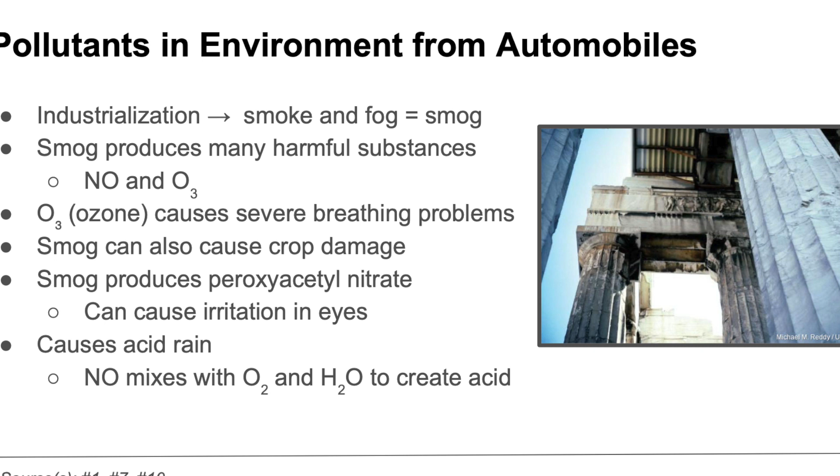One of the effects of smog can be seen here in the picture on the right. It was taken from the columns of the Parthenon in Athens, Greece, which is one of the most traffic-polluted cities. As you can see, the columns have been blackened by vehicle pollution, which is indicative of the problems that industrialization pollution has caused. Also, it just looks plain ugly.

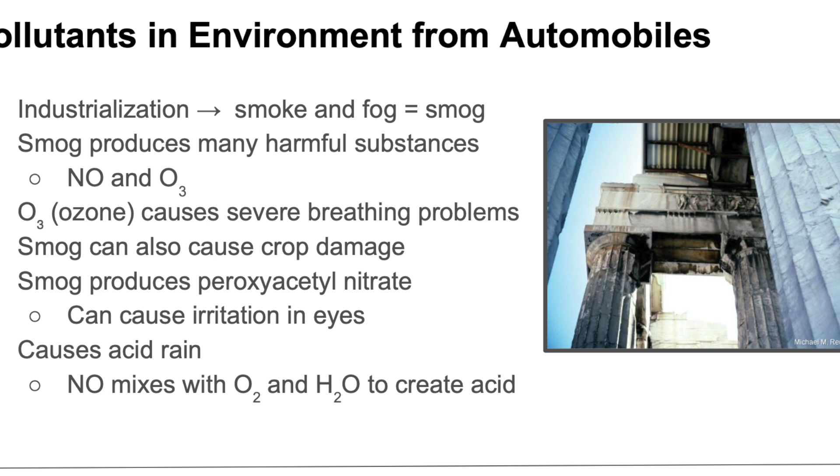In 1990, the Clean Air Act required that all automobile manufacturers install catalytic converters to comply with emission standards. The Clean Air Act was first enacted in 1955 with major revisions in 1970, 1977, and 1990.

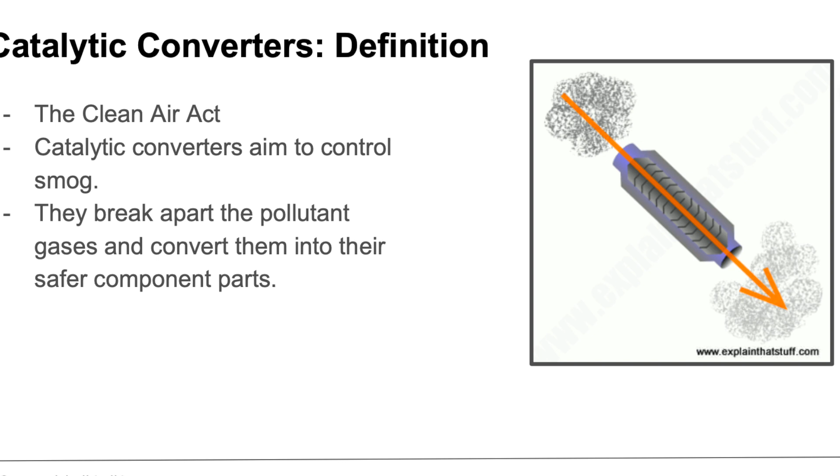The Clean Air Act requires the Environmental Protection Agency to set health-based standards for ambient air quality and set deadlines for the achievement of those standards by state and local governments. It also requires the Environmental Protection Agency to set national emission standards for large or ubiquitous sources of air pollution, including motor vehicles, power plants, and other industrial sources.

The Environmental Protection Agency mandates emission controls for sources of 187 hazardous air pollutants, many of which originate from combustion engines, including nitrogen oxides and carbon monoxide. It requires the prevention of significant deterioration of air quality in areas with clean air and contains a program to restore visibility impaired by regional haze or smog in national parks and wilderness areas.

The Clean Air Act also implements the Montreal Protocol, an international treaty signed by the United States to protect the ozone layer to phase out most ozone-depleting chemicals. Catalytic converters were originally added to cars around this time to help reach these goals.

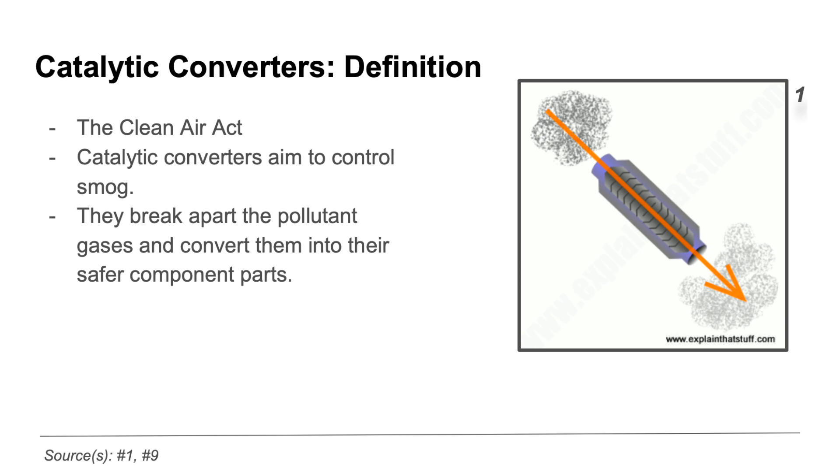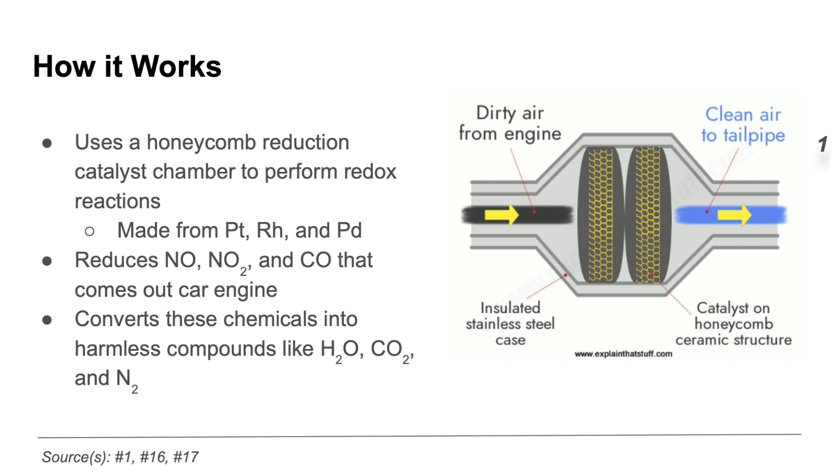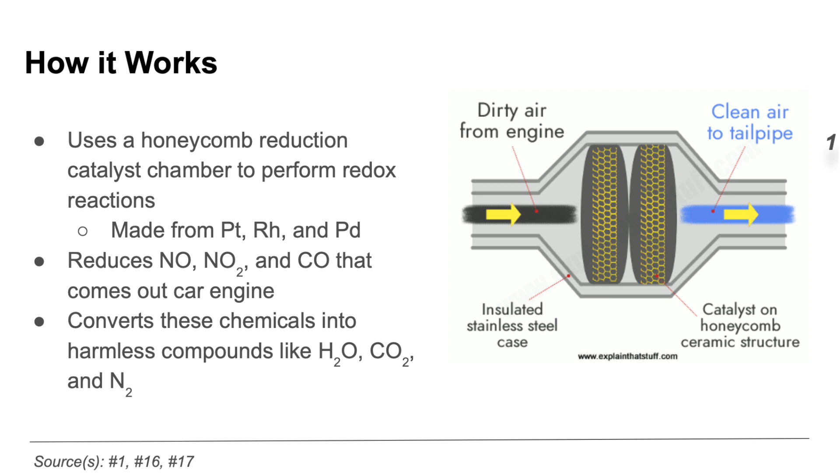A catalytic converter is essentially a component in a car that works by purifying harmful engine emissions with a honeycomb catalyst chamber. This honeycomb chamber is coated with a layer of platinum, rhodium, or palladium. The purification process happens via redox reactions that reduce harmful compounds such as nitric oxide, nitrogen dioxide, and carbon monoxide into harmless compounds like water, carbon dioxide, and nitrogen gas.

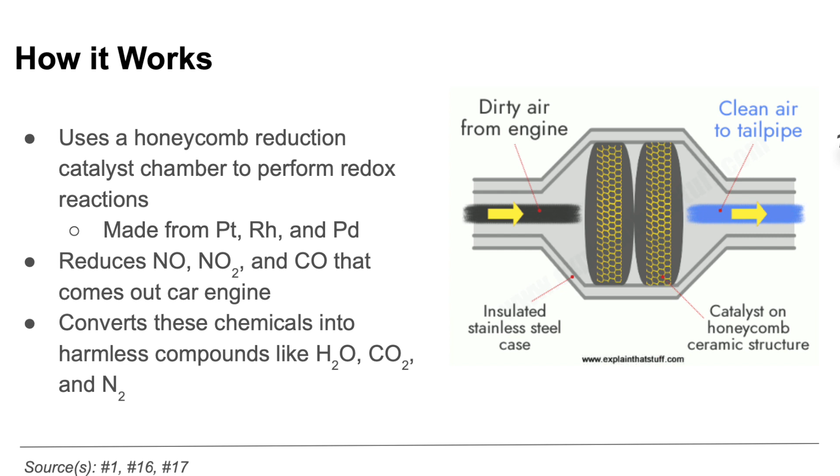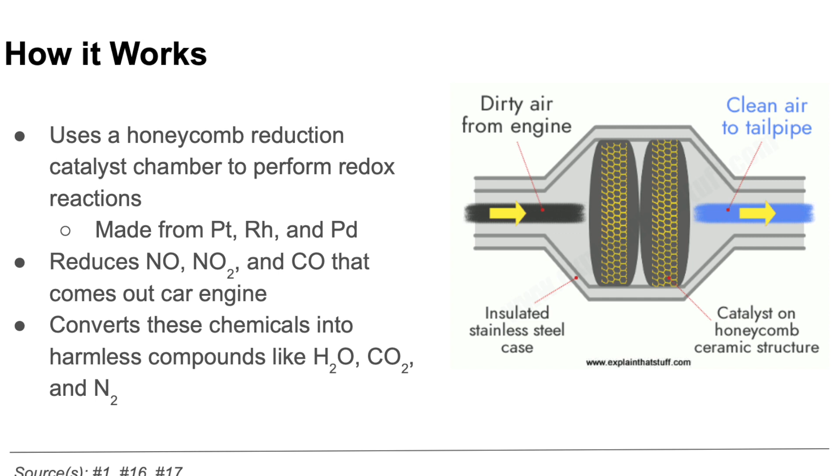Now you might be wondering why the converter is made out of a honeycomb chamber. The honeycomb chamber is actually designed to give the most surface area possible for the redox reactions to happen. It also allows air to go through it relatively smoothly, which is obviously ideal for car engines that need to get rid of their gases.

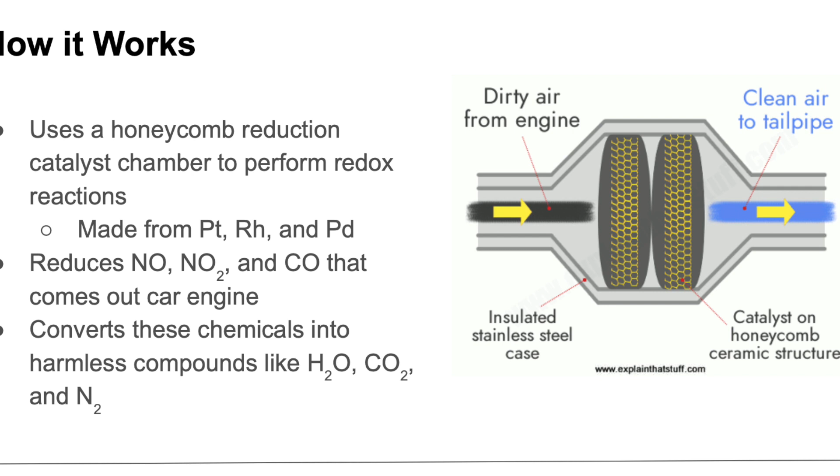You also might be wondering why the converter is usually made out of platinum, rhodium, or palladium. Well, on top of actually being the things that catalyze the redox reaction, these three elements are noble metals, which are excellent at resisting corrosion from the chemicals that are released from said engine. So basically, this allows the catalytic converter to last a long, long time.

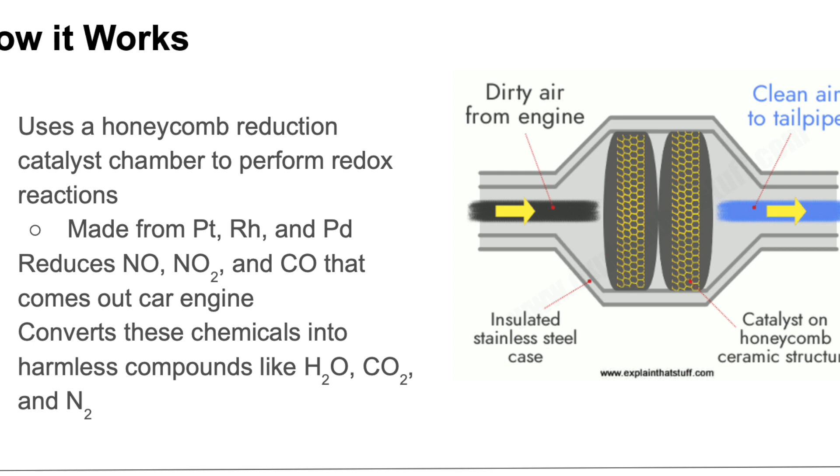Oxidation reactions occur when an atom loses an electron, a negatively charged particle, and reduction reactions occur when an atom gains an electron. The transfer of an electron from one species to another is called a redox reaction.

These reactions were originally named like this because they sometimes occur with atomic oxygen, and especially in cases with practical applications. In the example above, the electron from the A oxidation reaction would cancel out with the electron from the B reduction reaction. Each half reaction could combine to produce one redox reaction. So A plus B plus yields A plus and B.

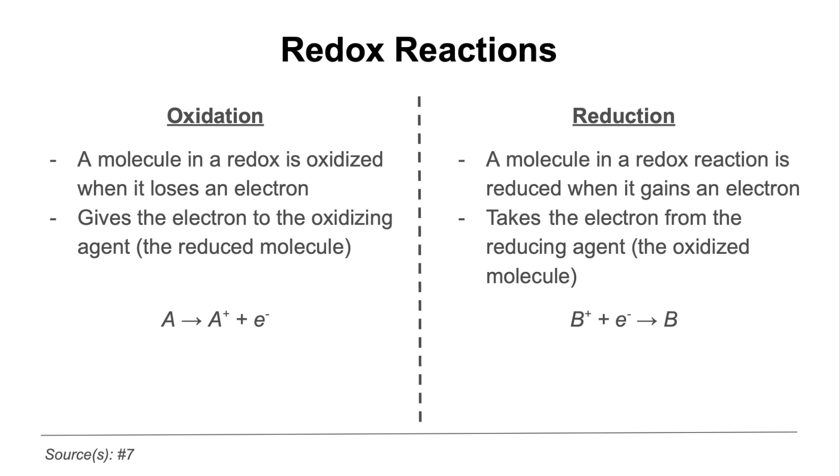An example of a redox reaction is a thermite reaction where solid iron 3 oxide reacts with solid aluminum to produce aluminum oxide and liquid iron metal. Catalytic converters use redox reactions to break down dangerous molecules into their inert gaseous states, which we see examples of in the next few slides.

Daily, people are exposed to nitrogen oxides, which include nitrogen monoxide and nitrogen dioxide, among others. Low-level exposure is not that harmful to humans, but high levels of exposure can irritate the skin through contact and the respiratory system through inhaling it. Nitrogen monoxide specifically is a colorless gas with a sharp, sweet odor.

Nitrogen dioxide is a yellow gas with a bleach-like smell. Symptoms of exposure are coughing, wheezing, difficulty breathing, and the development of asthma. Because of these effects, children and the elderly are the highest risk populations of nitrogen oxide poisoning.

During the first stage of the catalytic process, the platinum and rhodium covered parts of the honeycomb structure capture the nitrogen from the nitrogen oxides, and the leftover oxygen binds to free oxygen to make O2 gas. The nitrogen molecules then react with each other to form nitrogen gas, which is emitted through the exhaust.

Nitrogen gas is still harmful to humans with high exposure because of its affinity to bond and replace oxygen in breathing, leading to suffocation. At least nitrogen gas doesn't have the chronic side effects and low exposure risks that nitrogen oxides do.

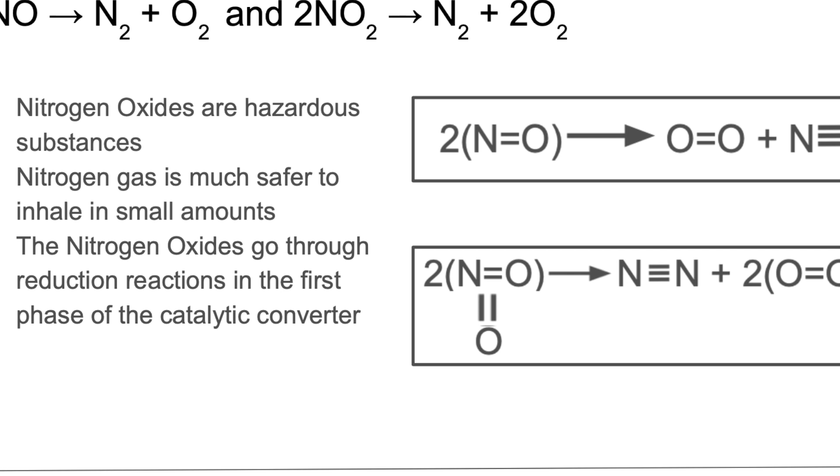Carbon monoxide is a harmful gas. It is colorless and odorless. It is dangerous because it more readily binds to the hemoglobin in our blood, stopping oxygen from binding. This can lead to suffocation. Symptoms of carbon monoxide poisoning are fatigue, headaches, confusion, dizziness, and even death.

Hydrocarbons are extremely harmful substances. They are found in many objects, such as paint thinners, motor oil, and lotions. Hydrocarbon poisoning is most commonly caused by inhalation of the gaseous form, but the solid and liquid forms can be ingested.

Hydrocarbons can affect the respiratory, cardiovascular, gastrointestinal, and nervous systems. Pulmonary toxicity is the most common, though. Symptoms of hydrocarbon poisoning can be seen in many parts of the body, but the pulmonary symptoms mainly develop from the damage of the alveoli by the physical gas itself.

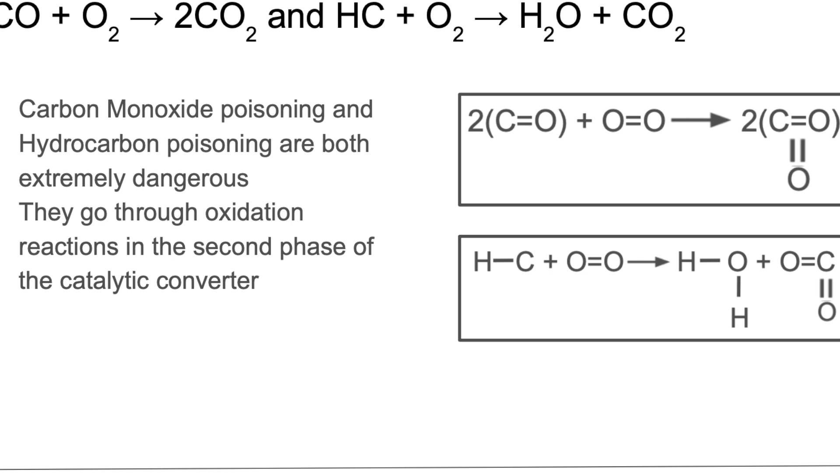Both carbon monoxide and hydrocarbons go through an oxidation reaction in the second phase of the catalytic converter. Here, they are converted into much less harmful carbon dioxide and water.

There are many advantages pertaining to the use and development of catalytic converters. By reducing emissions, catalytic converters improve air quality, thereby reducing the risk of health problems related to air pollution.

Catalysts offer the opportunity to directly convert toxic molecules in water to non-toxic products. Like catalytic converters used in cars to break down gaseous pollutants from fuel combustion, small catalysts can be used to purify water as well.

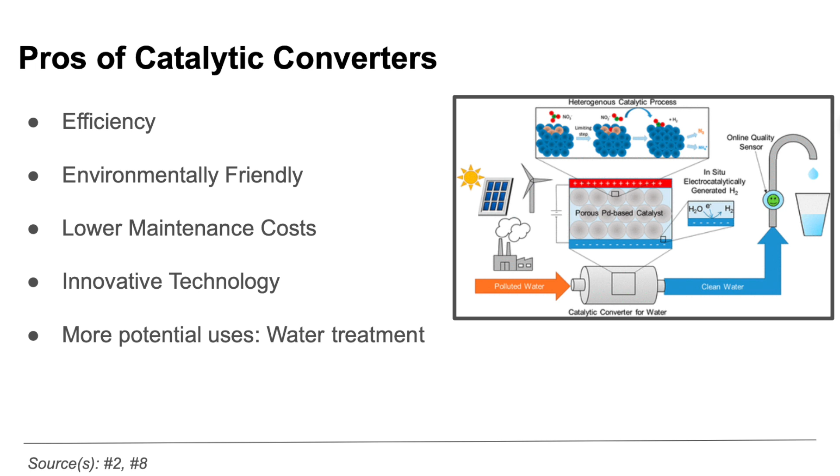Innovations in catalytic converter technology, such as three-way converters and palladium, platinum, and rhodium reduction, or PGM reduction, can improve efficiency and reduce the cost of production. Benefits of these innovations include reduced emissions, improved fuel efficiency, and increased durability.

Catalytic processes may be a competitive alternative to conventional water treatment technologies. They have much faster kinetics and are less operationally sensitive than current bioremediation-based methods.

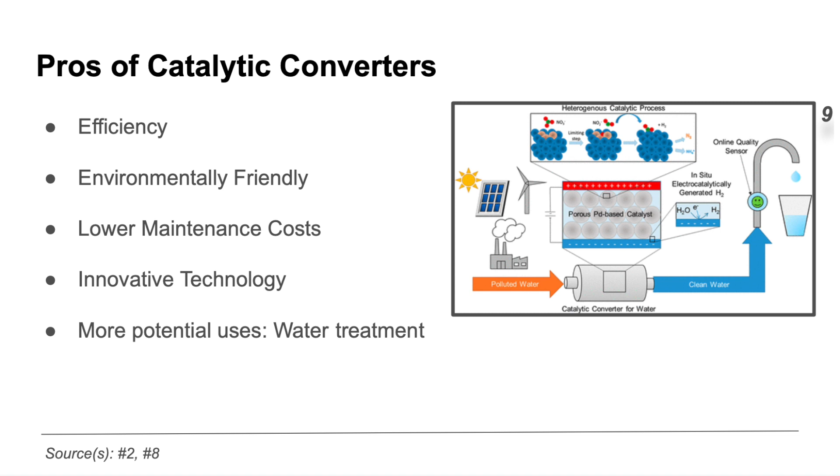But catalytic converters do not always work perfectly. There are numerous downsides to catalytic converters, and here are some just to name a few. Sometimes they may not always be effective, and not all pollutants can be dealt with via the converter's chemical reactions, and some pollutants can still escape into the environment. When catalytic converters fail, they can produce even more pollutants sometimes.

Signs of a catalytic converter that needs to be replaced can include a smell of sulfur from the exhaust, dark exhaust smoke, or extreme heat coming from underneath the vehicle.

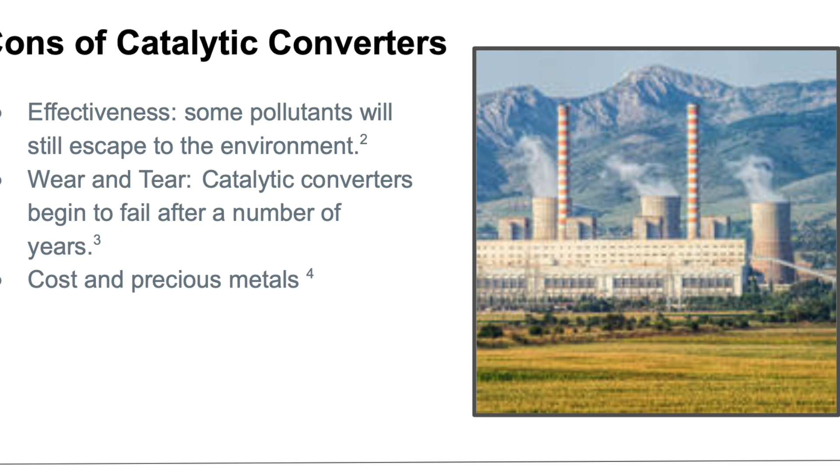Pertaining to cost, research in atmospheric chemistry has revealed that the composition of exhaust is more complex than originally thought, and multiple stages have had to be added to catalytic converters to remove different pollutants, which unfortunately increases their cost as a result. Catalytic converters require precious metals like platinum and palladium in order to function as well.

Electric vehicles don't require catalytic converters because no combustion reaction occurs that could produce harmful gaseous pollutants. If we continue to use combustion engines, the catalytic converters of the future could be upgraded to last longer and require fewer rare materials in order to operate effectively.

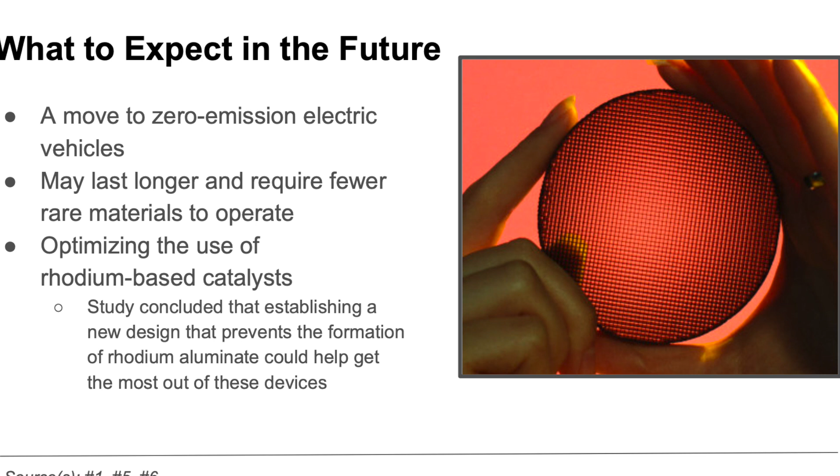One study from the U.S. Department of Energy's Advanced Photon Source, APS, identified structures of rhodium aluminate, an inactive compound in catalytic converters, resulting from exposure to extreme heat generated by other automotive components. At these high heats with oxygen exposure, rhodium dissolves and degrades into the stable compound rhodium aluminate.

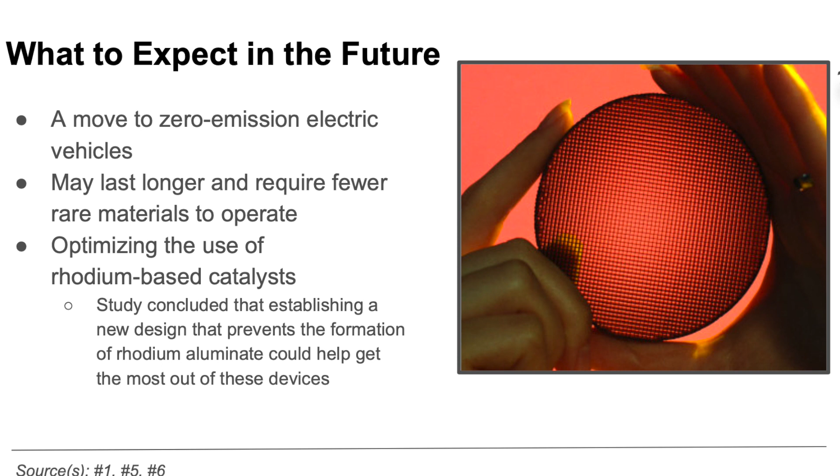This compound, however, is chemically inactive, meaning that it can't scrub away harmful pollutants and gases, acting as a catalyst, making the device effectively useless.

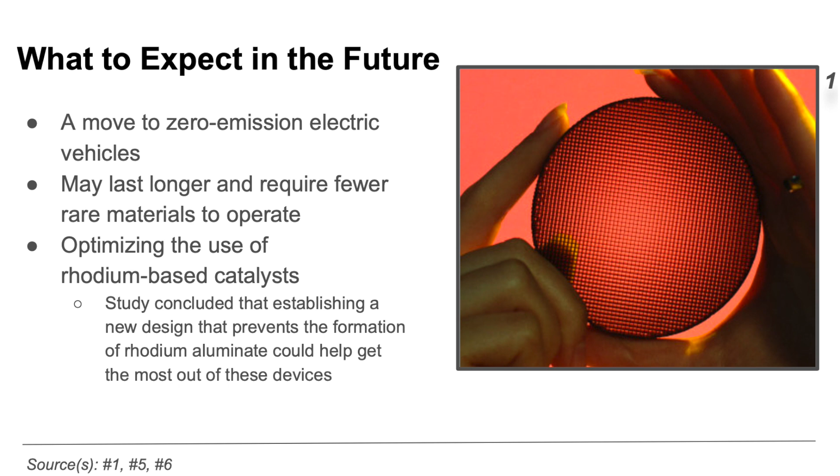But this reaction, importantly, is reversible. When exposed to hydrogen, some of the rhodium becomes active again, but not nearly enough to return the catalytic converter to its former efficiency. The results of the study concluded that a new design that prevents the formation of rhodium aluminate could help get the most out of these devices in the long run, or reverse the reaction more completely and restore the catalytic converter to its original efficiency.